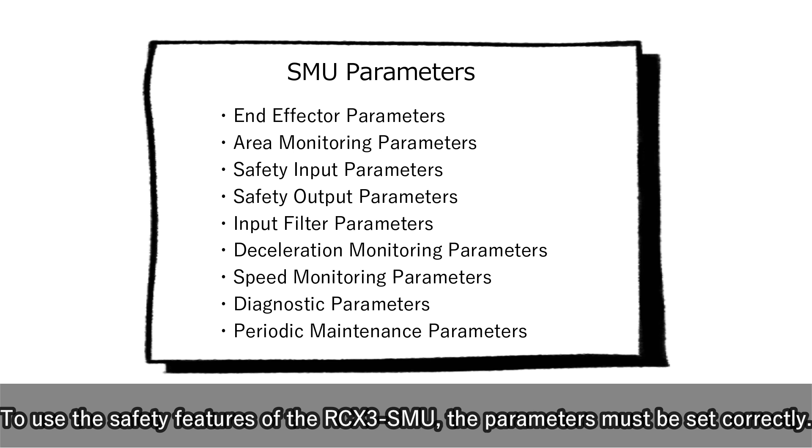To use the safety features of the RCX3-SMU, the parameters must be set correctly. This video explains the SMU parameters that deal with safety input, safety output, input filter and deceleration monitoring.

The safety input parameters are used for assigning safety functions to the general-purpose safety inputs 1 through 4. Safety input GP1 sets which safety functions are assigned to the external safety devices wired to pins A7 and A8 of the safety I/O connector.

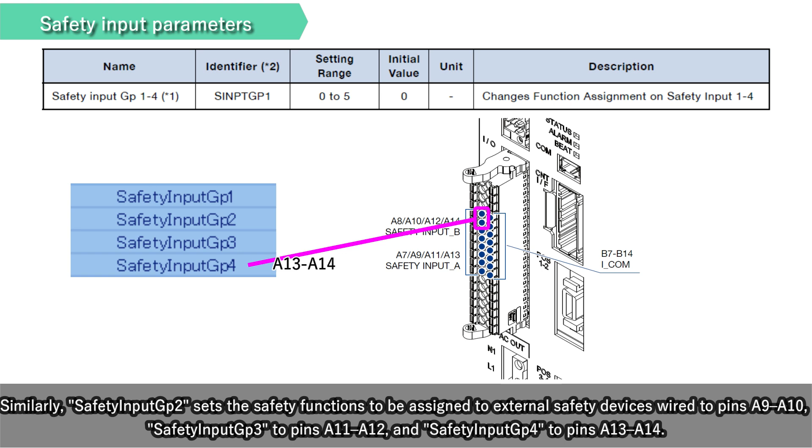Similarly, safety input GP2 sets the safety functions to be assigned to external safety devices wired to pins A9 and A10. Safety input GP3 to pins A11 and A12, and safety input GP4 to pins A13 and A14. These are the functions that can be assigned with the settings. With the None setting, no safety functions are set.

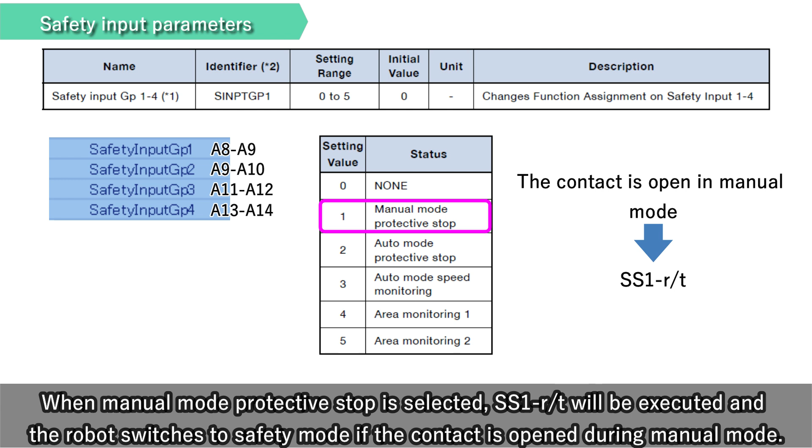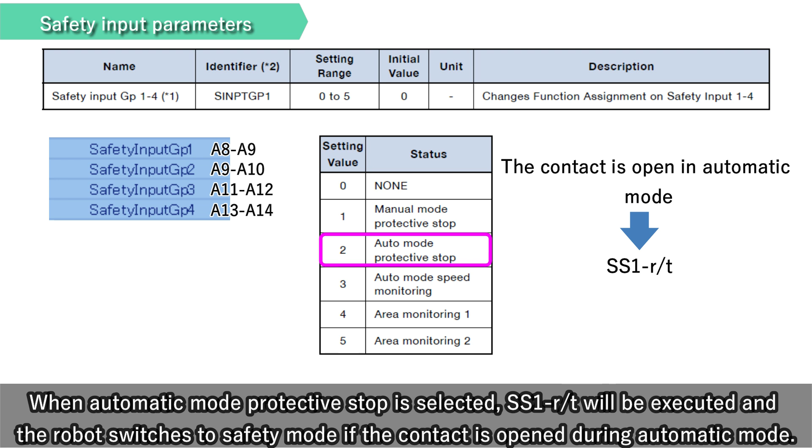When manual mode protective stop is selected, SS1-r/t will be executed and the robot switches to safety mode if the contact is open during manual mode. When automatic mode protective stop is selected, SS1-r/t will be executed and the robot switches to safety mode if the contact is open during automatic mode.

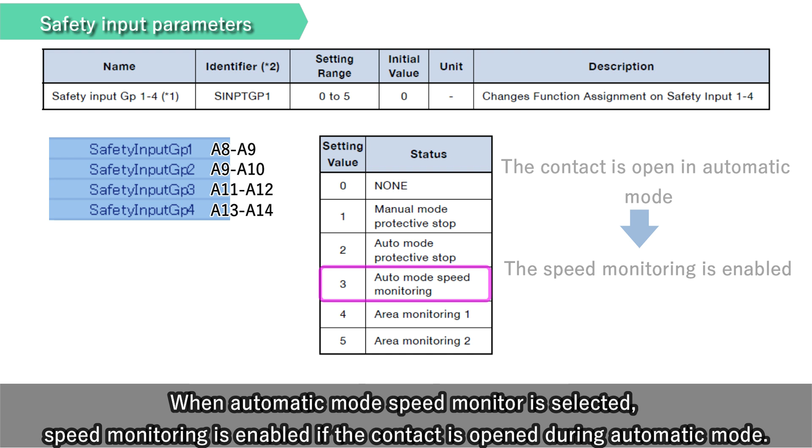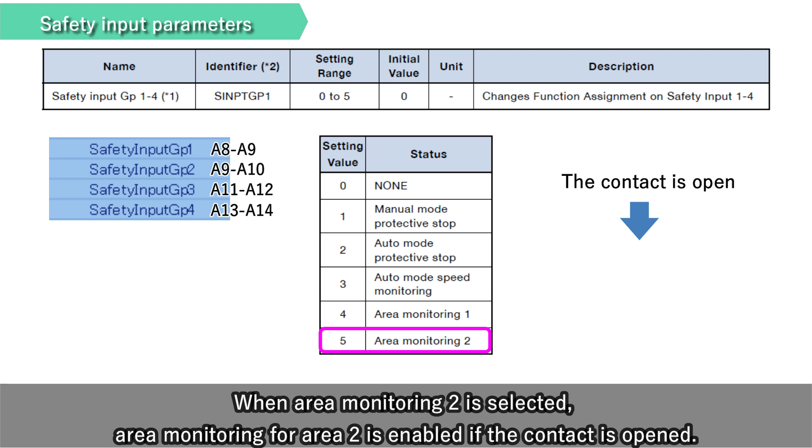When automatic mode speed monitor is selected, speed monitoring is enabled if the contact is open during automatic mode. When area monitoring 1 is selected, area monitoring for area 1 is enabled if the contact is opened. When area monitoring 2 is selected, area monitoring for area 2 is enabled if the contact is opened.

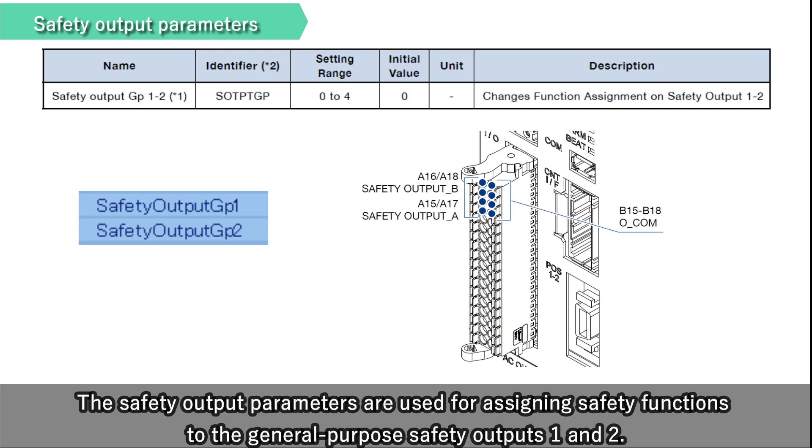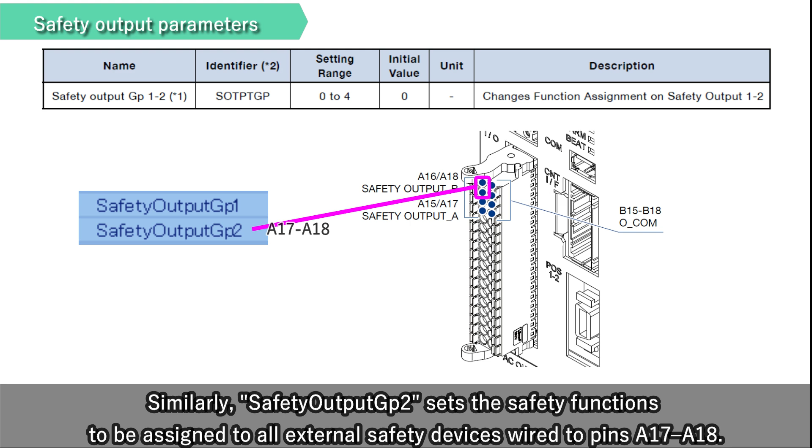The safety output parameters are used for assigning safety functions to the general-purpose safety outputs 1 and 2. Safety output GP1 sets which safety functions are assigned to the external safety devices wired to pins A15 and A16 of the safety I/O connector. Similarly, safety output GP2 sets the safety functions to be assigned to all external safety devices wired to pins A17 and A18.

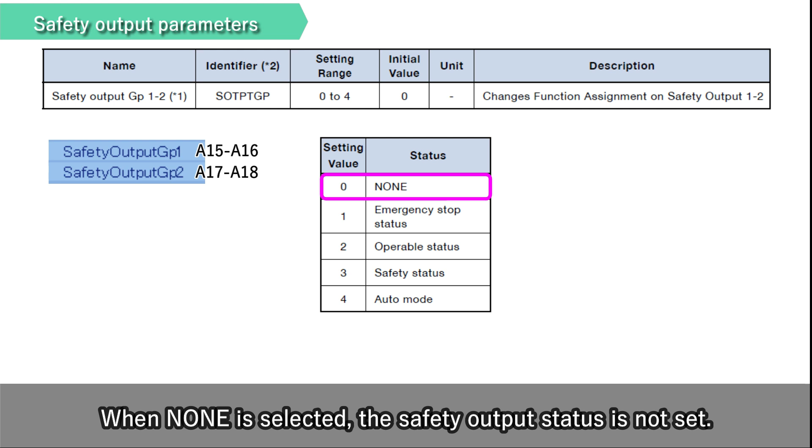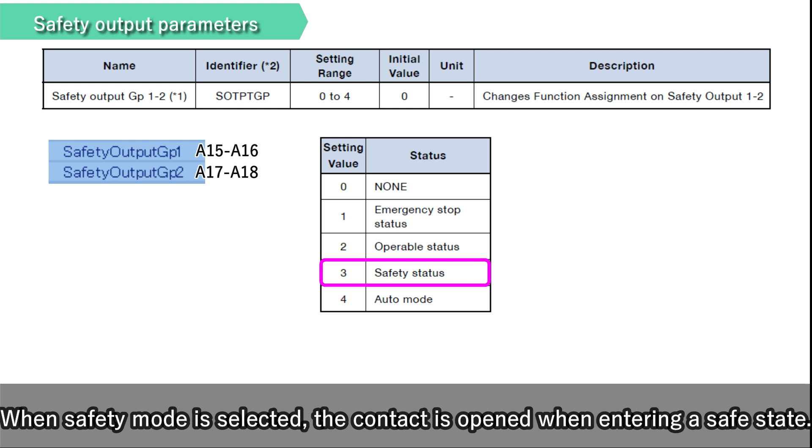These are the functions that can be assigned with the settings. When None is selected, the safety output status is not set. When emergency stop mode is selected, the contact is opened upon emergency stop. When operable status is selected, the contact is closed when returning to an operable state. When safety mode is selected, the contact is open when entering a safe state. When automatic mode is selected, the contact is closed when entering automatic mode.

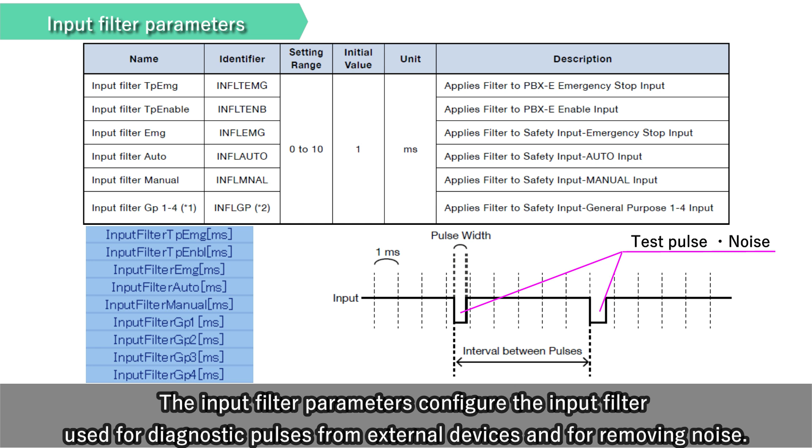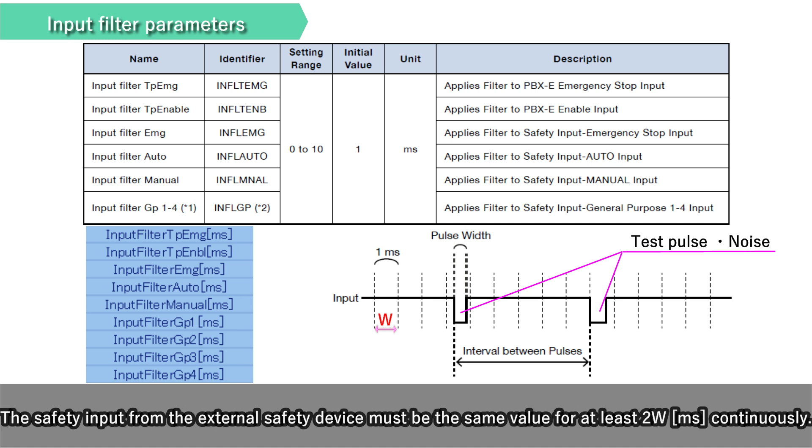The input filter parameters configure the input filter used for diagnostic pulses from external devices and for removing noise. The input filter has parameters that set which noise is to be removed as well as the value, W ms, that exceeds the maximum pulse width of the test pulse. The safety input from the external safety device must be the same value for at least 2W ms continuously. This parameter affects the response time of the safety function.

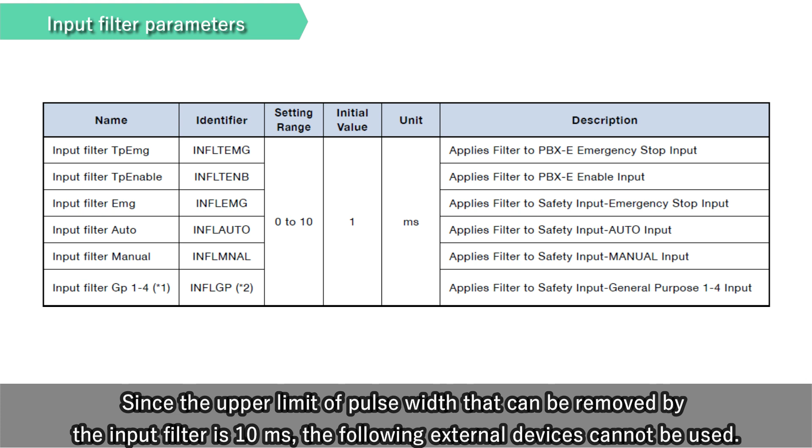The parameters in this table are related to the input filter. Since the upper limit of pulse width that can be removed by the input filter is 10 milliseconds, the following external devices cannot be used. Devices for which a test pulse width of 10 milliseconds or less cannot be set. Devices for which the test pulse interval cannot be set greater than 2W plus 1 millisecond.

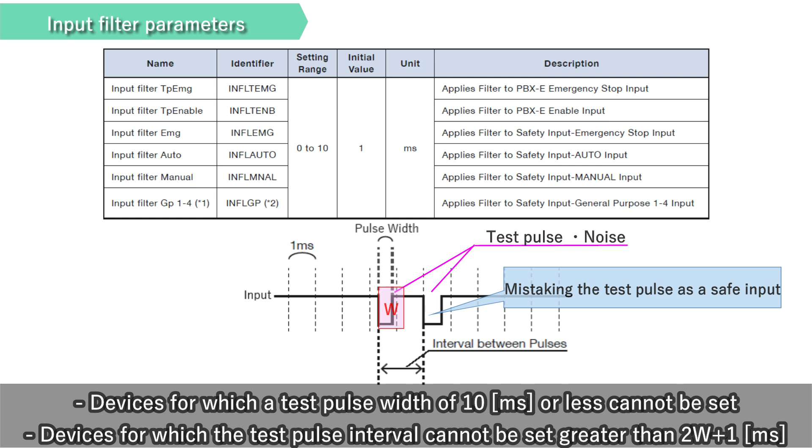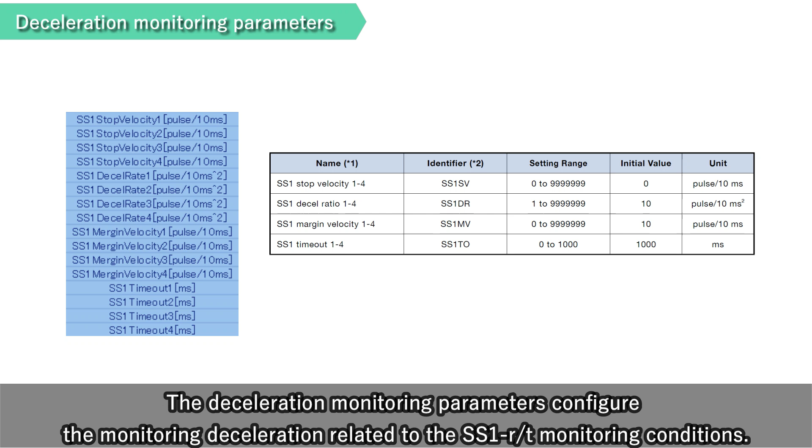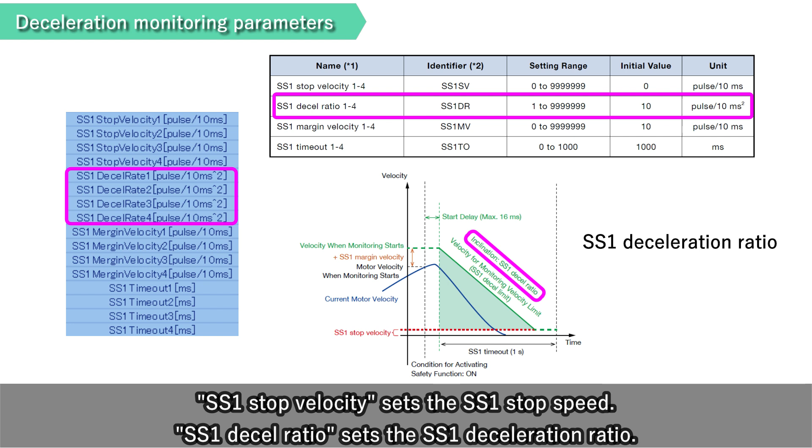The deceleration monitoring parameters configure the monitoring deceleration related to the SS1-r/t monitoring conditions. The parameters related to deceleration monitoring are shown on this table. SS1 stop velocity sets the SS1 stop speed. SS1 decel ratio sets the SS1 deceleration ratio. SS1 margin velocity sets the SS1 margin speed. SS1 timeout sets the SS1 timeout time.

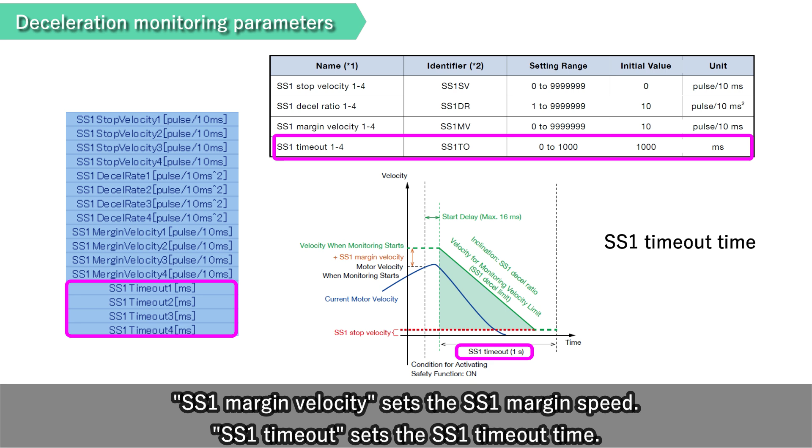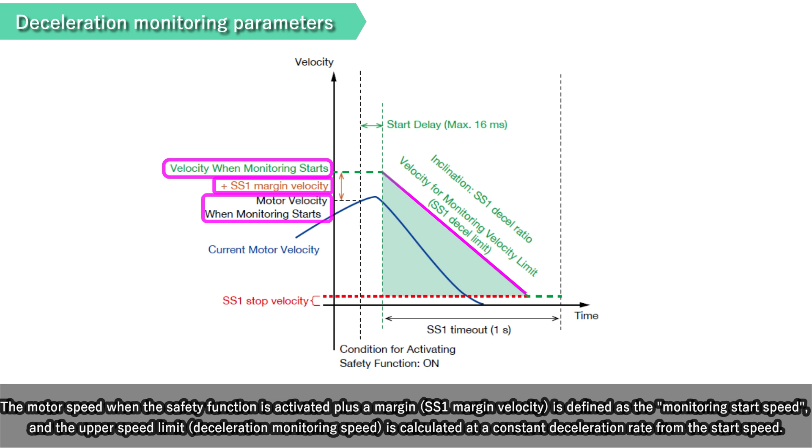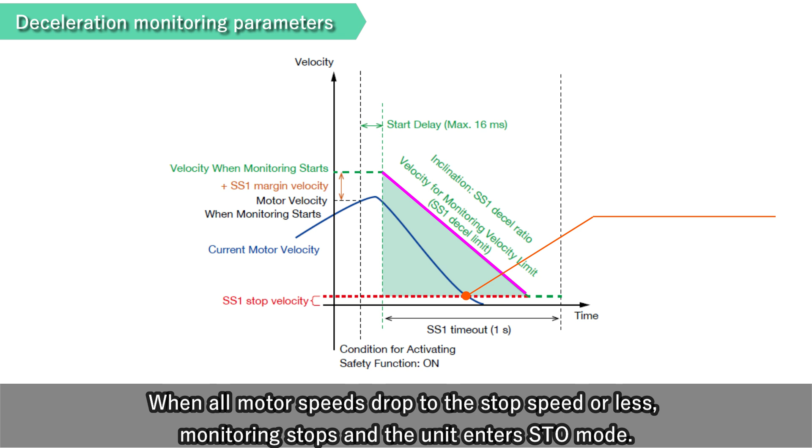The motor speed when the safety function is activated plus a margin, SS1 margin velocity, is defined as the monitoring start speed, and the upper speed limit, deceleration monitoring speed, is calculated at a constant deceleration rate from the start speed. Monitoring continues if the current motor speed is below the deceleration monitoring speed for the elapsed time. When all motor speeds drop to the stop speed or less, monitoring stops and the unit enters STO mode.

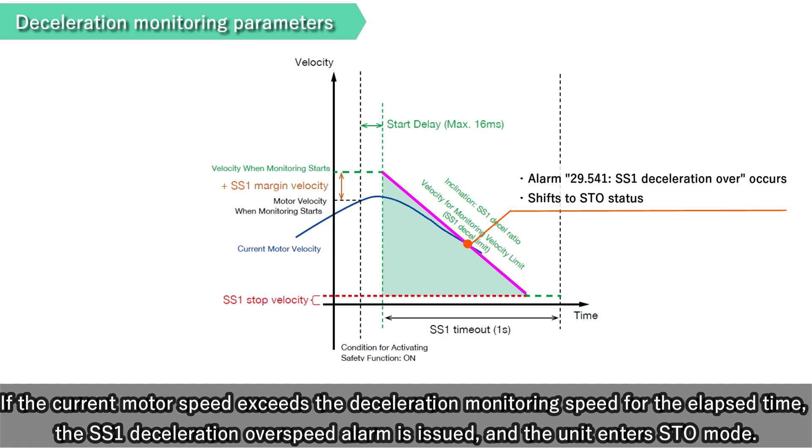If the current motor speed exceeds the deceleration monitoring speed for the elapsed time, the SS1 deceleration overspeed alarm is issued, and the unit enters STO mode. If the elapsed time exceeds the timeout time, the SS1 timeout alarm is issued and the unit switches to STO mode.

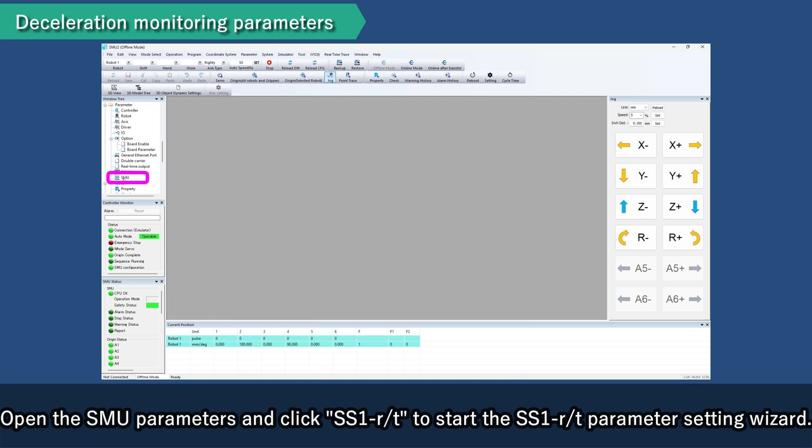You can use a dedicated wizard to configure the deceleration monitoring parameters. Open the SMU parameters and click SS1-r/t to start the SS1-r/t parameter setting wizard. Follow the message, confirm that the maximum payload during the operation is set to the robot parameter tip weight, and click Next. The recommended parameter values are automatically calculated. Click Next. Click Finish to finish the wizard. The calculated values are set for the SS1-r/t parameters of the SMU parameters.

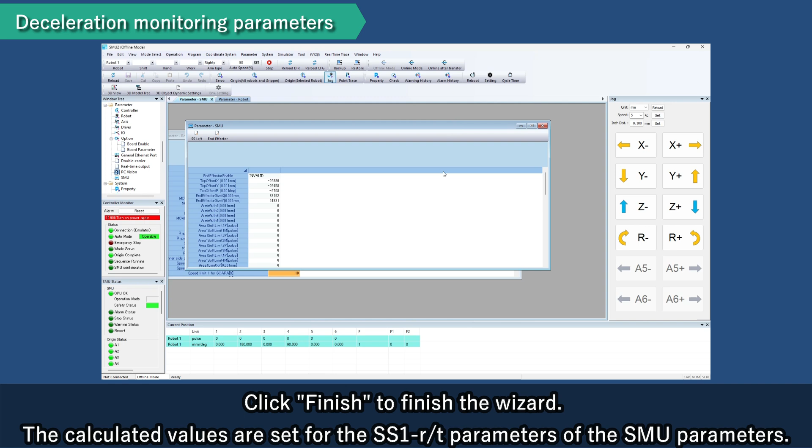That is all for explanation of the parameters that deal with safety input, safety output, input filters and deceleration monitoring.